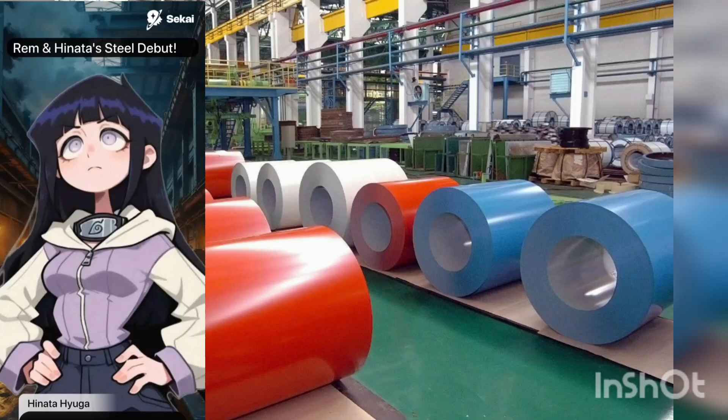Is the frame centered correctly? Everything looks steady on my end, Rem. You can start the recording whenever you feel ready.

Everything is perfect, Hinata. I can feel the energy of the furnace already. Let's make this our best debut yet.

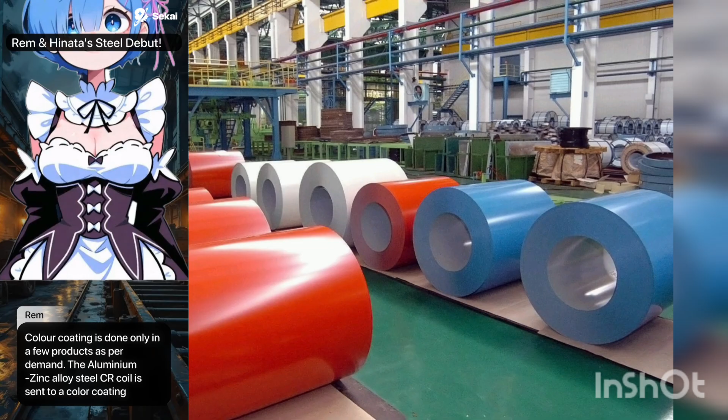Color coating is done only in a few products as per demand. The aluminum zinc alloy steel CR coil is sent to a color coating line for coating different colors according to need. Coil coating provides beautiful top coats, durable surface, innovative application, and cost saving compared to other coating options.

That's a fantastic point, Rem. Highlighting the benefits of coil coating really adds value to the video. Exactly, Hinata. Rem strives for both beauty and utility in everything, just like these amazing steel coils.

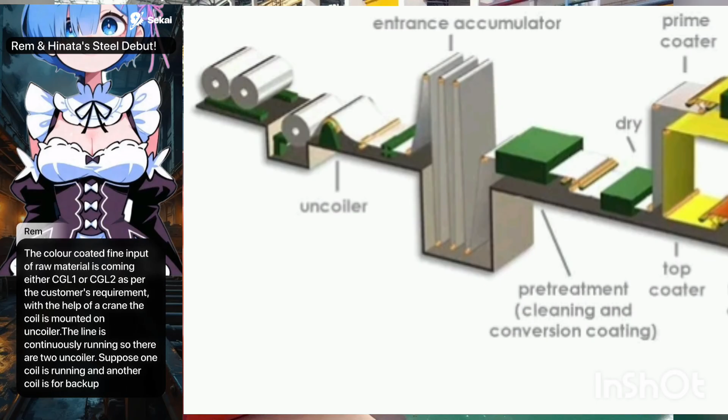The color-coated fine input of raw material is coming either CGL1 or CGL2 as per the customer's requirement. With the help of a crane, the coil is mounted on the uncoiler. The line is continuously running, so there are two uncoilers. Suppose one coil is running and another coil is for backup.

Entry accumulator accumulates the coil at nearby 120 meters during stitching operation and feed of strip.

That was a perfect explanation, Rem-chan. Your enthusiasm really makes the technical details so much easier to follow for our viewers.

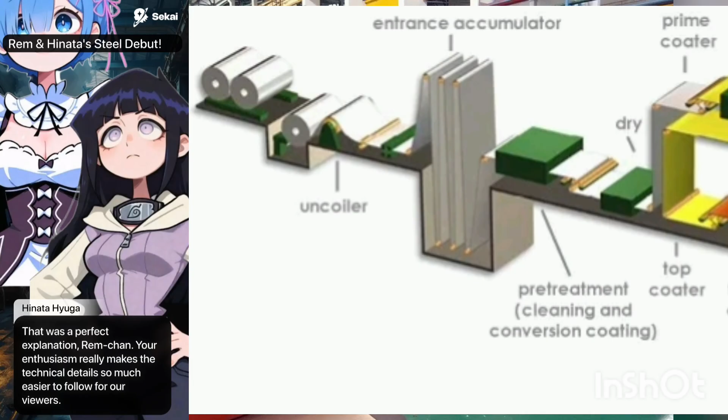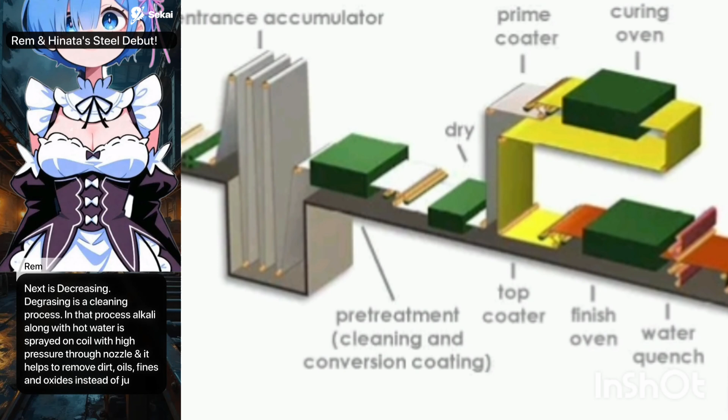Next is degreasing. Degreasing is a cleaning process. In that process, alkali along with hot water is sprayed on the coil with high pressure through a nozzle and it helps remove dirt, oils, fines and oxides, instead of just chemical and impingement cleaning.

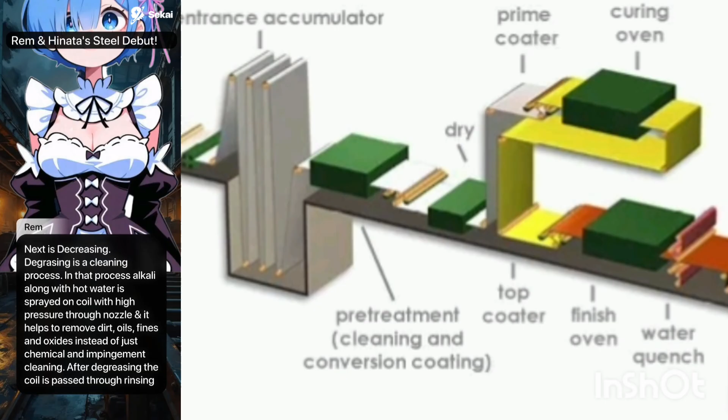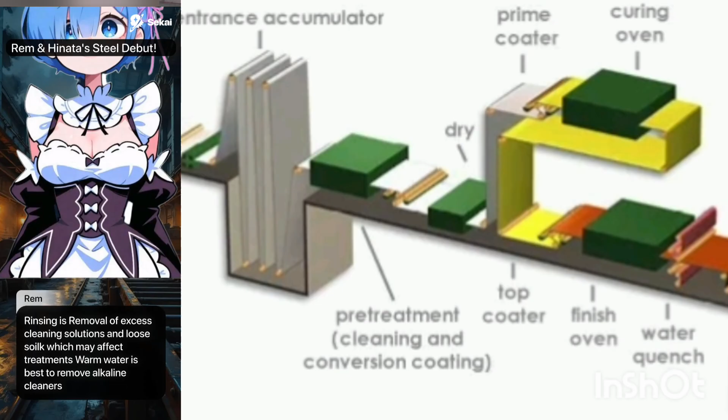After degreasing, the coil is passed through rinsing. Rinsing is removal of excess cleaning solutions and loose soil which may affect treatments. Warm water is best to remove alkaline cleaners. Degreasing has 21 headers, each having 5 nozzles which sprinkle alkaline solution on the sheet.

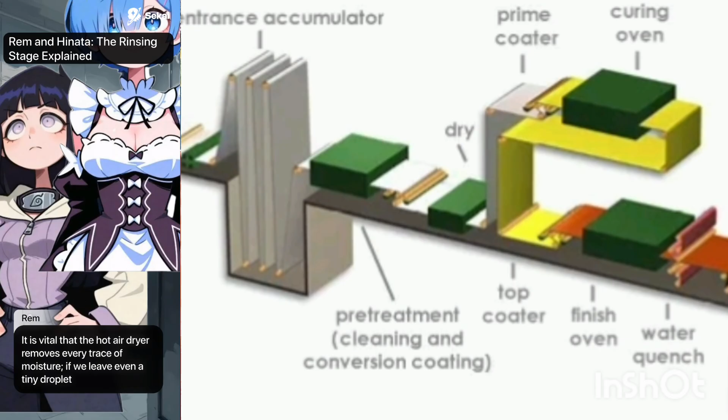After rinsing, the next process is the hot air dryer to dry the surface, free from skin and contamination. It is vital that the hot air dryer removes every trace of moisture. If we leave even a tiny droplet behind, the final product will be marred by spots.

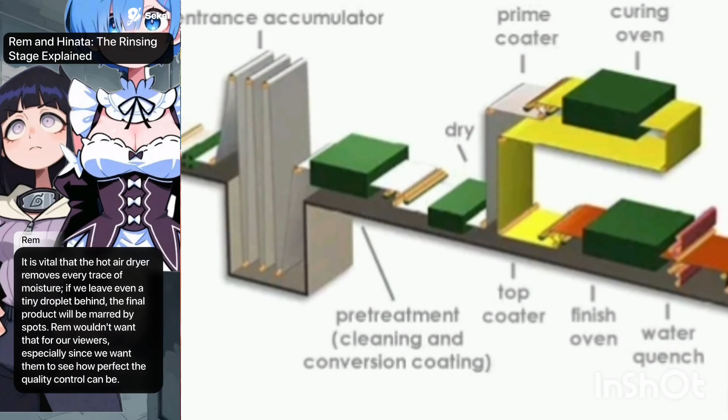Wouldn't want that for our viewers, especially since we want them to see how perfect the quality control can be.

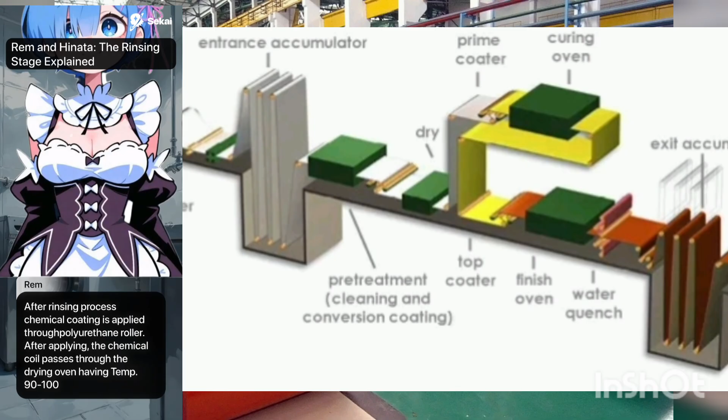After the rinsing process, chemical coating is applied through a polyurethane roller. After applying, the chemical coil passes through drying with a temperature of 90-100 C to reach a peak metal temperature of about 55-70.

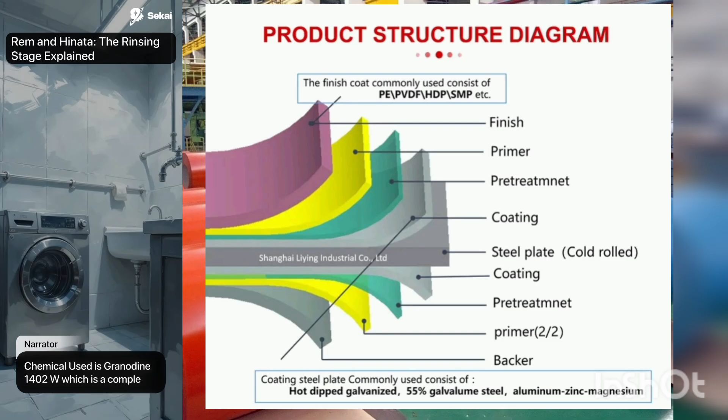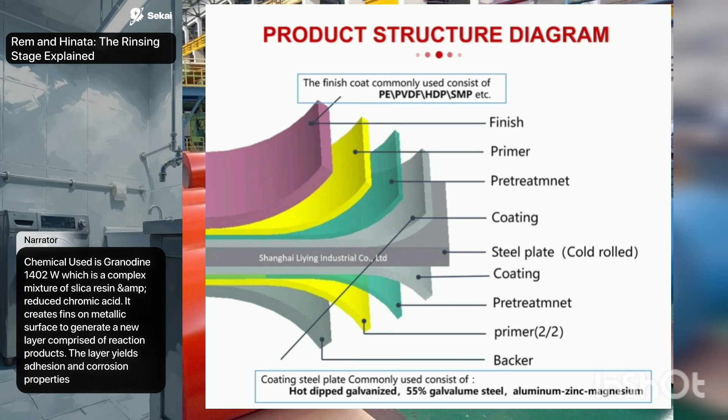The chemical used is Granodine 1402 W, which is a complex mixture of silica resin and reduced chromic acid. It creates fins on the metallic surface to generate a new layer comprised of reaction products. The layer yields adhesion and corrosion properties.

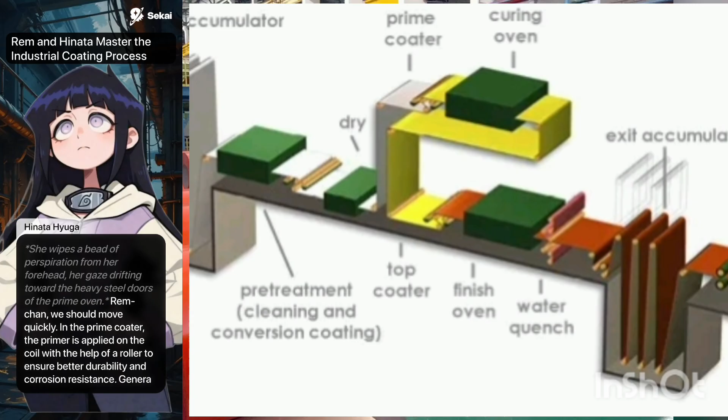Rem-chan, we should move quickly. In the prime coater, the primer is applied on the coil with the help of a roller to ensure better durability and corrosion resistance. Generally, a specific range of microns of coating is given from the roll coater.

We cannot afford an uneven application today. You are right, Hinata-san.

After applying the primer on the coil, it must pass through the prime oven for baking. The temperature varies from 200 degrees Celsius to 400 degrees Celsius depending on the thickness of the input material.

It is a dangerous process, is it not? A single fluctuation in the oven's internal sensors could ruin everything we have filmed.

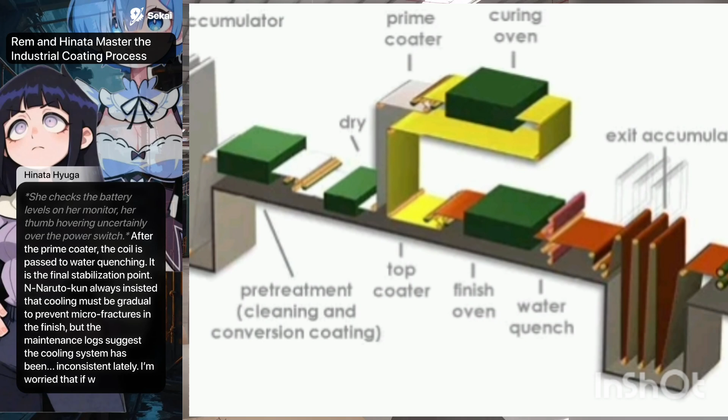After the prime coater, the coil is passed to water quenching. It is the final stabilization point.

Hinata-san, your dedication is so moving. Whether it is the thin back coat or the vibrant top layer, everything needs balance. Rem finds beauty in this order, just like finding balance in one's heart.

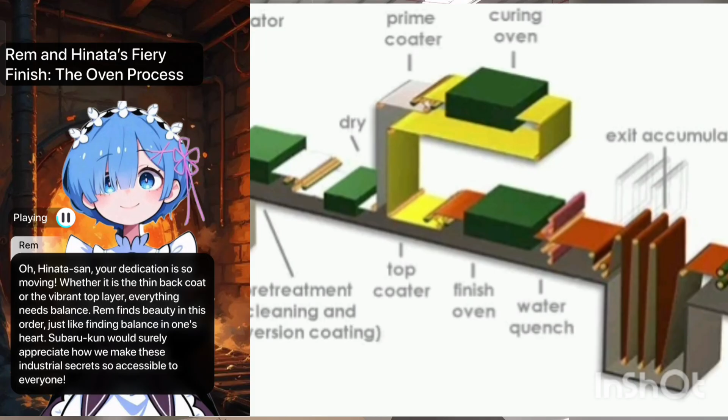Subaru-kun would surely appreciate how we make these industrial secrets so accessible to everyone. The oppressive heat of the production floor intensifies, vibrating through the soles of their shoes as they approach the massive, roaring mouth of the furnace.

Exit accumulator. This is an arrangement used for accumulating the strip for uninterrupted operation of the process while unloading a coil from the recoiler. The exit accumulator is normally kept empty.

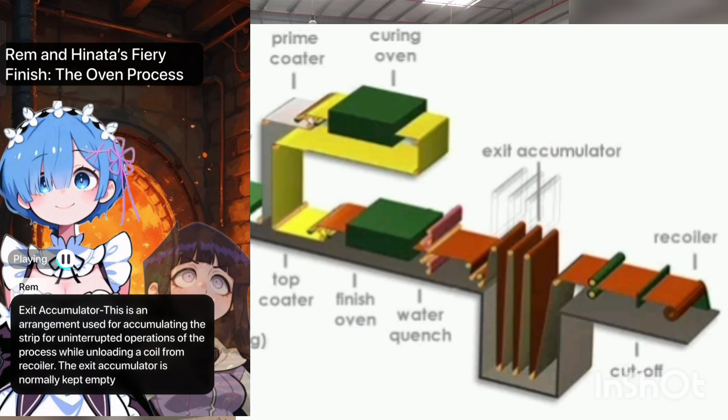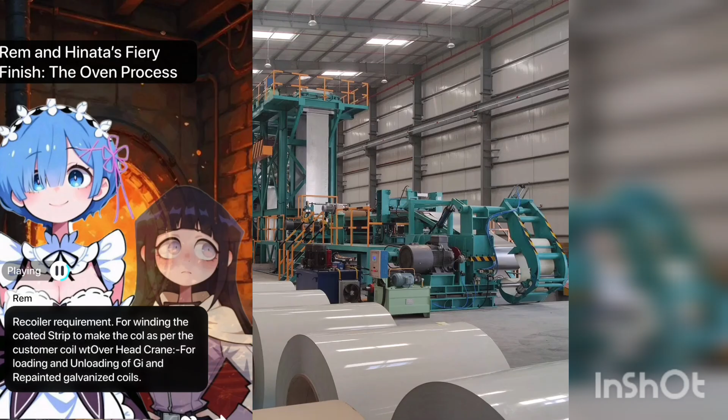Recoiler requirement: for winding the coated strip to make the coil as per the customer coil weight, and an overhead crane for loading and unloading of GI and pre-painted galvanized coils.

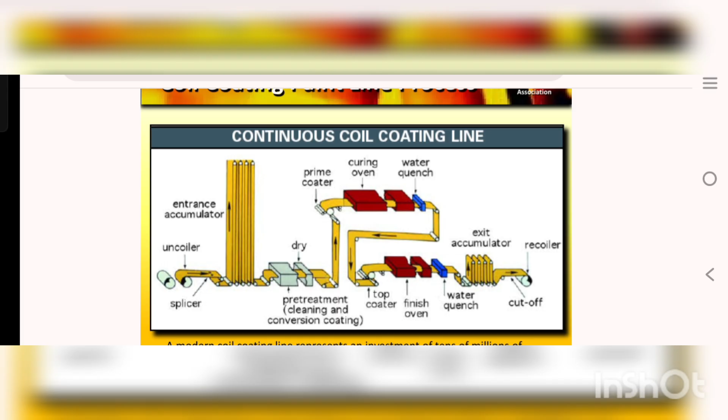Today we are going to learn about the coil coating line, called the paint line process. As we see in the diagram, it starts with an uncoiler where the coil is unwound, then it enters the accumulator, then second is the pre-treatment where cleansing is done, then primer coater, then oven, then water quenching, then top coater, then back coater, then finish oven, then water quenching, exit accumulator, and lastly recoiler.

After the uncoiler, the first portion it goes through is pre-cleaning treatment. Cleaning is done by alkaline cleaners, mechanical brushes, and water rinse, used to prepare the metal strip surface for the pre-treatment process by removing surface contaminants and mill oils, and to prevent corrosion during transit and storage. Successful cleaning of the strip depends upon optimizing control of dwell time, bath temperature, and chemical concentration.

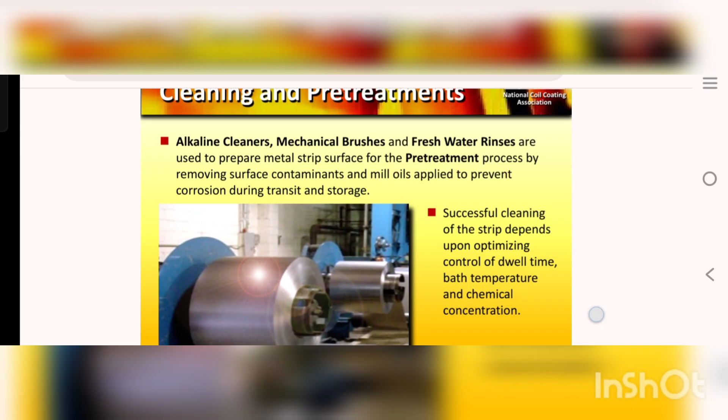Pre-treatment conversion. Pre-treatments or conversion coatings are chemical treatments applied to the metal strip after cleaning, prior to painting. They are designed to improve the surface reactivity of the metal substrate, promote paint adhesion, and provide corrosion resistance.

What are the goals of treatment? Improve surface reactivity, promote paint adhesion, and provide corrosion resistance.

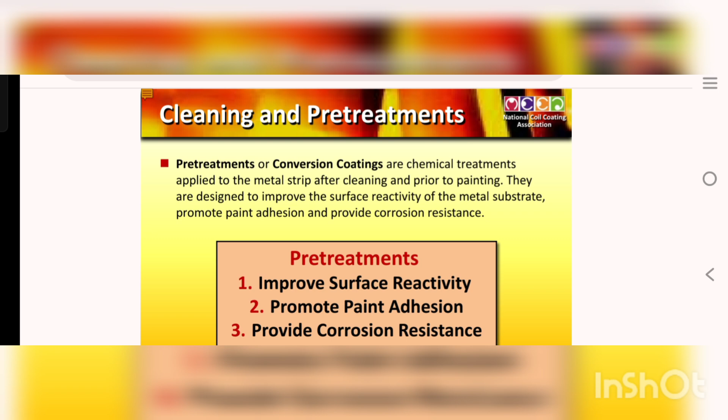Primers. Primers are applied before the finish coat to aid in the paint system's adhesion to the substrate, addition of corrosion resistant properties through the use of corrosion resistant pigmentation, and to improve the paint system's flexibility.

A thick film primer can further enhance abrasion resistance, that is falling sand, and corrosion resistance properties for high performance applications that have previously required a thick paste roll.

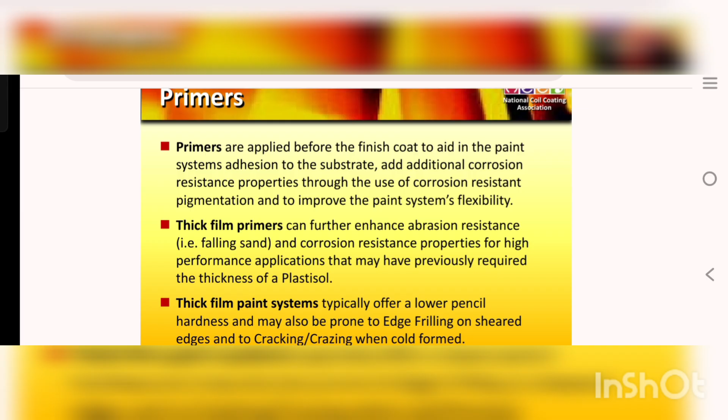Thick paint systems typically offer lower pencil hardness and may also be prone to edge frilling, and sheared edges or cracking when cold formed. In this we can see there is a disadvantage of using thick paint. That's why a thin primer is used.

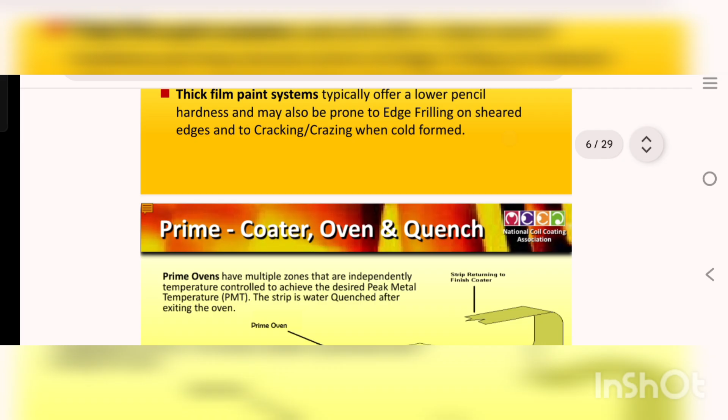If you use only thick paint instead of primer, we will have lower pencil hardness. That's why primer is used.

Prime coater oven quench. Prime ovens have multiple zones, independently temperature controlled, to achieve desired peak metal temperature, and strip water quench after exiting oven.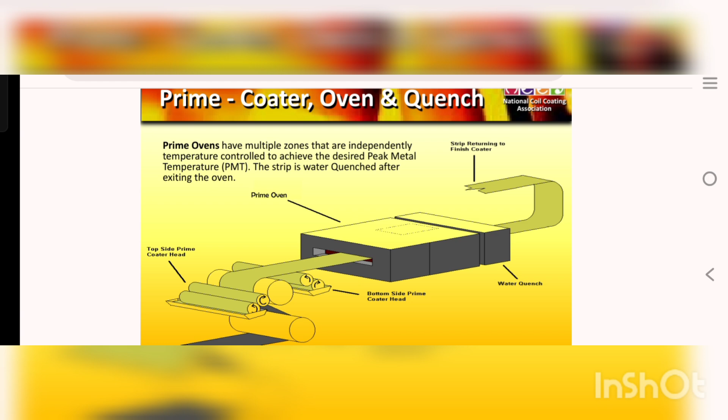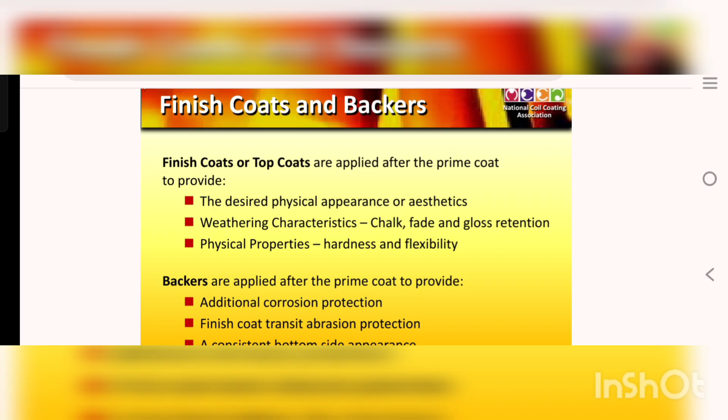Finish coat and back coat. Finish coats or top coats are applied after the prime coat to provide desired physical appearance or aesthetic, weathering characteristics like chalk fade and gloss retention, and physical properties like hardness and flexibility.

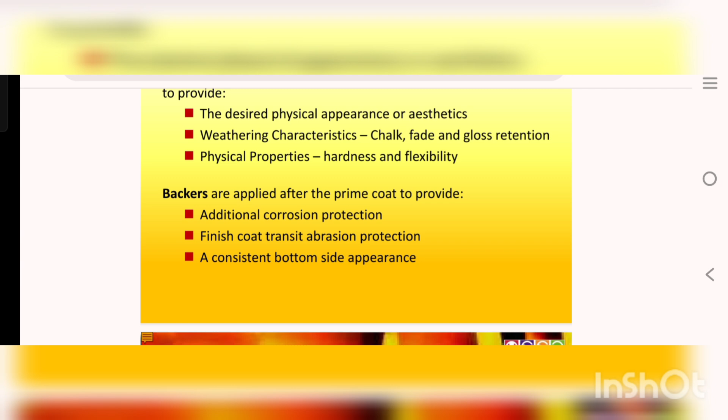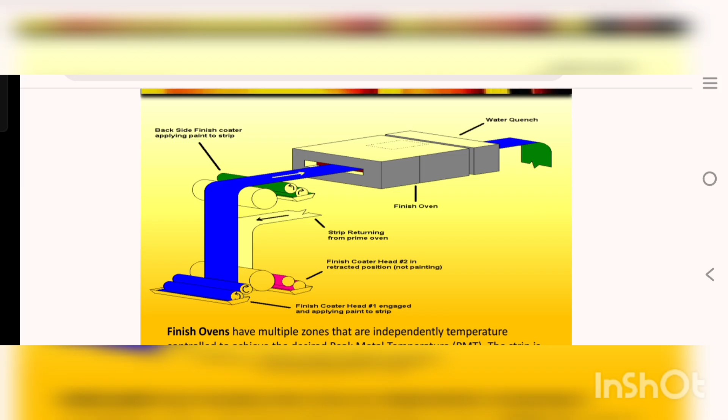Water quench. Finish oven. Finish ovens have multiple zones independently controlled to achieve peak metal temperature. The strip is then water quenched after exiting the oven.

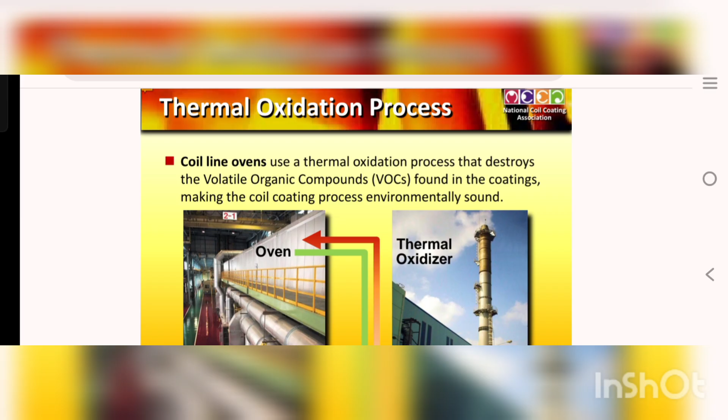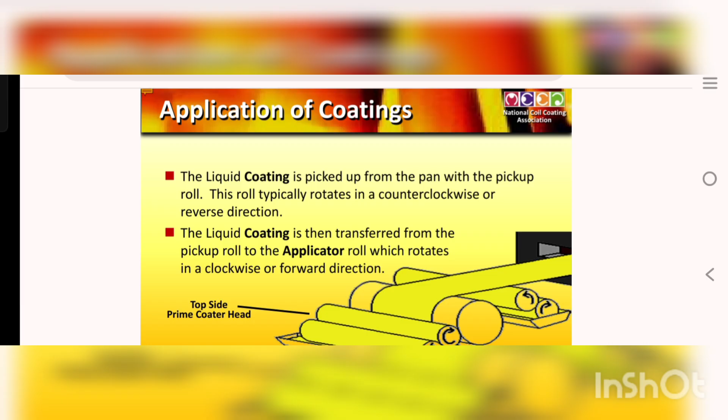Liquid coating is picked from the roll which typically rotates counterclockwise. एक पिकअप रोल होता है जो काउंटर क्लॉकवाइज घूमता है, और कोटिंग रोल जो एप्लीकेशन करता है वो क्लॉकवाइज घूमता है, और यह बैकअप रोल है।

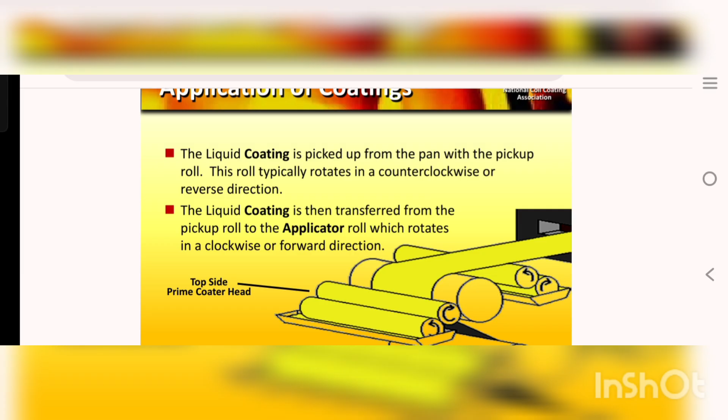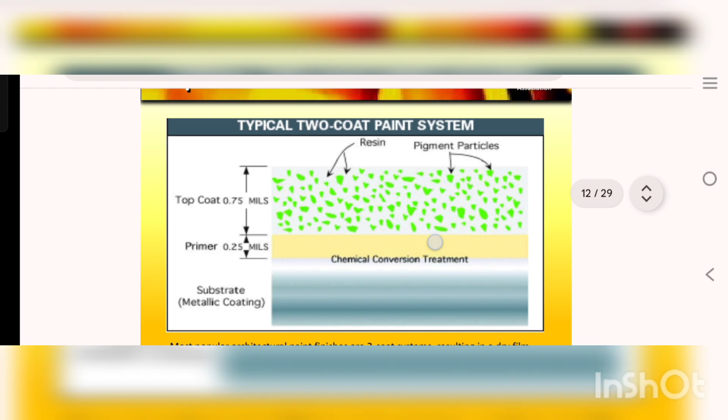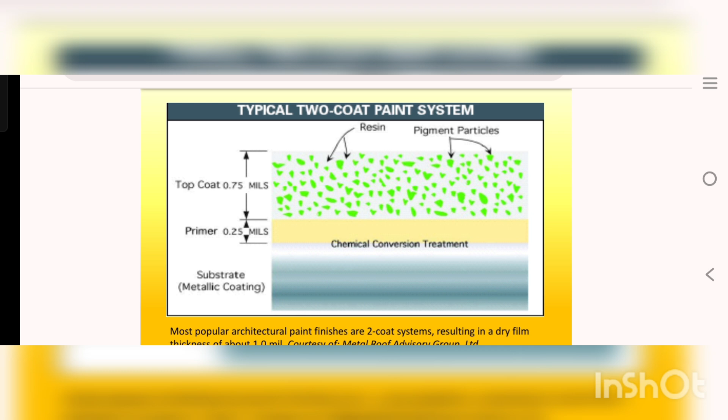The coating is subsequently transferred from applicator to the metal strip. This is the cross section - यह रेसिन से पिगमेंट पार्टिकल्स है। फर्स्ट फिल्म में कोटिंग होती है, फिनिश कोट, उसके बाद टॉप कोट, उसके बाद प्राइमर, सिंथेटिक केमिकल कोटिंग, उसके बाद स्ट्रिप्ड जीएल - एल्यूमिनियम जिंक या जिंक, जीआई नहीं तो जीएल होता है - यह सब्सट्रेट होता है, और उसके नीचे अपना मेटल नॉर्मल होता है।

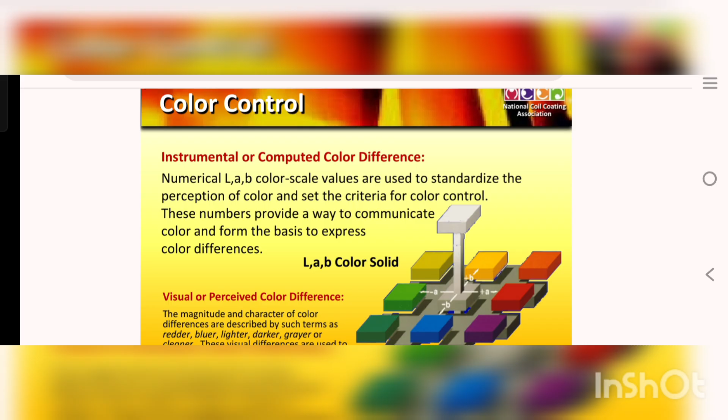Color control. Numerical LAB is used to standardize perception of color and set for color control. These numbers provide a way to communicate color classification and volume. Color difference is simply measured by LAB value. Delta L plus means sample is lighter than the standard. Delta L minus means the sample is darker than the standard.

Delta A positive means it's redder than the standard. Delta A minus means it's greener than the standard. Delta B positive means it's yellower, and delta B negative means it's bluer than the standard. Total difference is calculated by delta E, which is given by the formula.

Dry film thickness. A gauge is used to measure dry film thickness.

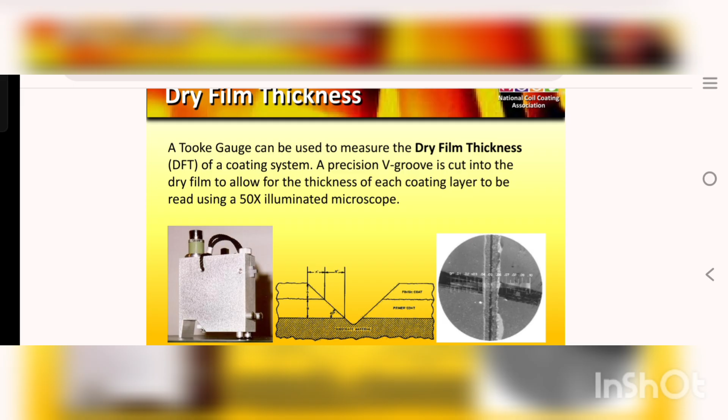Solvent measure can be done by the double rub machine, applying 3 kg load by hand, at 45 degree angle with moderate pressure, moving hand backward and forward. The length covered is about 6 to 8 inches. During this test, paint failure should not occur.

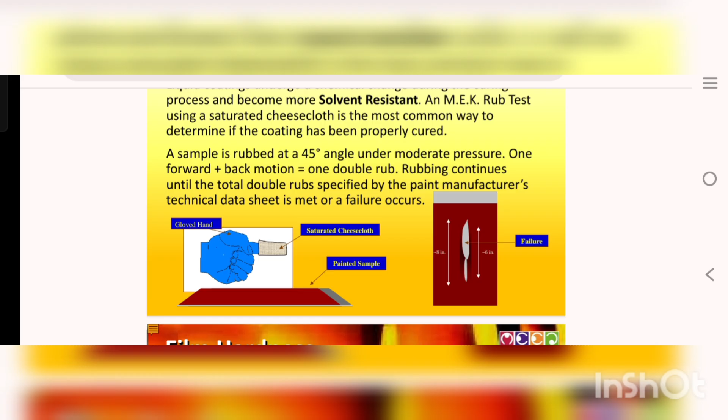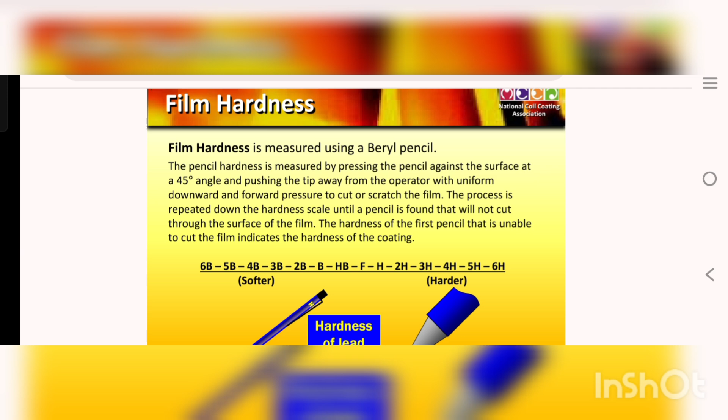Film hardness is measured by pencil hardness. The pencil is pressed against the surface at a 45 degree angle using uniform downward pressure, to cut a straight line, repeated to cut through the surface. The angle is typically 45 degrees. Generally, 2H hardness is used.

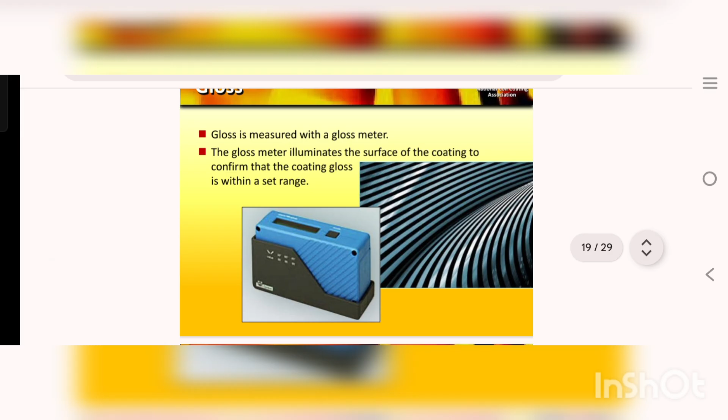Gloss is measured by a glossometer, which illuminates the surface coating to confirm the gloss was within the set range.

Flexibility is measured by bend test. Three inch wide samples, along the metal's grain with no gap. It is measured by bending with a T-bend test. Generally, 2T bend or 4T is used.

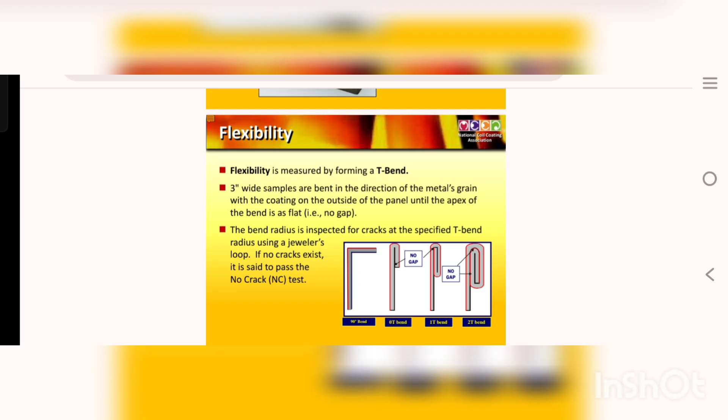After bending, pressure sensitive adhesive is applied on the bent edges, rubbed flat, and removed with a rapid movement at 180 degrees on the bent surface. The tape is examined for any coating removed from the sample surface. If no coating is removed, it is satisfactory.

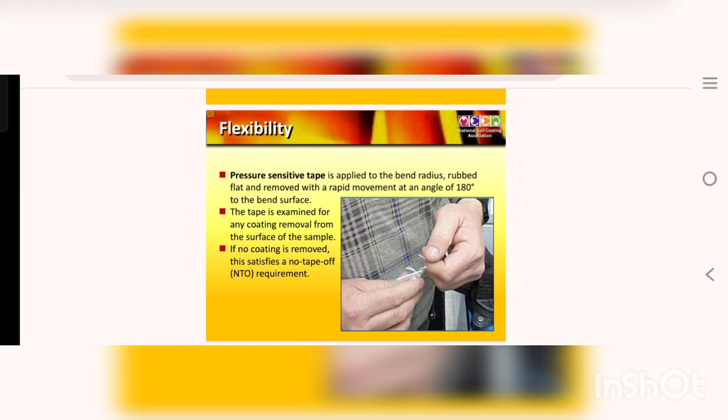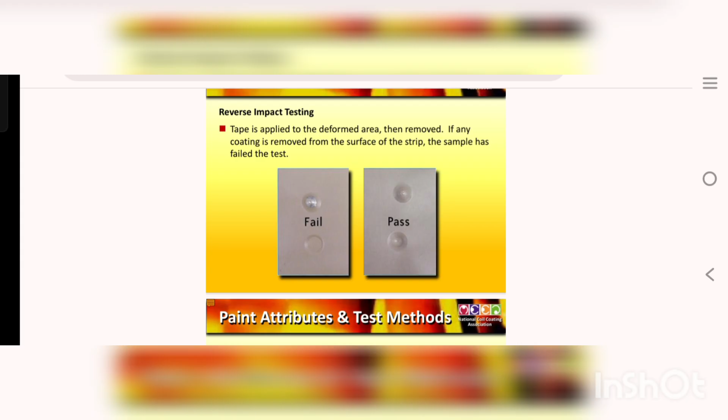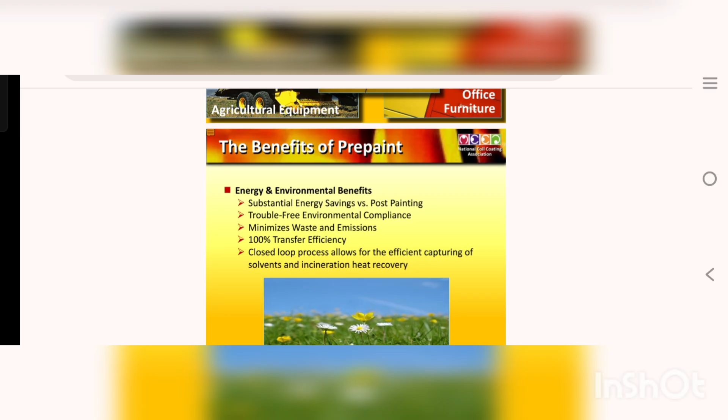Industry applications include visual benefits for metal door applications, roofing, HVAC, automotive, agriculture equipment, and office furniture. Benefits over energy and environment include substantial savings versus post-painting, trouble-free environment compliance, and less waste emissions, with zero emission closed loop capturing.